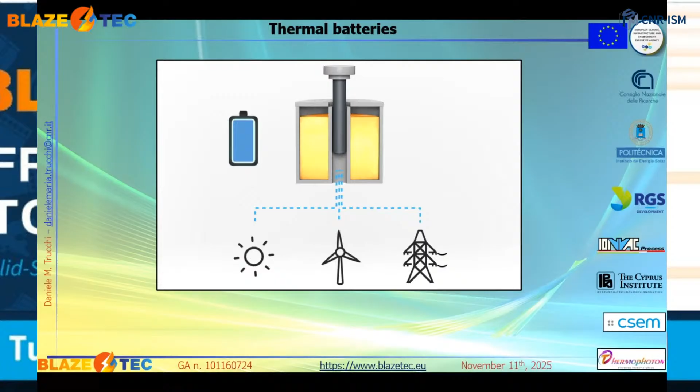Thermal batteries can be charged by renewable energy, such as concentrated sunlight, or excess energy coming from wind or photovoltaic systems. The discharge of thermal batteries occurs by transmitting energy to the grid, and for this it is necessary to have efficient and compact converters to convert efficiently the stored energy.

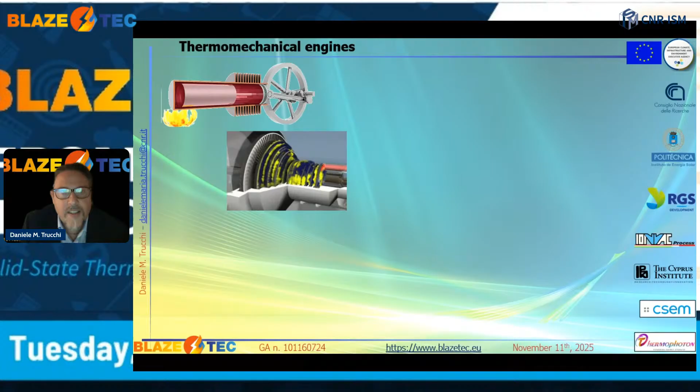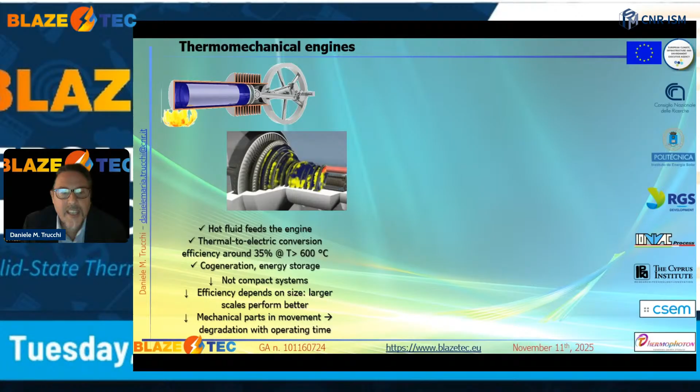Historically, the technology used thermomechanical engines like turbines and Stirling engines. They work with hot fluids feeding the engines, with high thermal to electric conversion efficiency at high temperature. They allow cogeneration and energy storage. On the other hand, they are not compact systems - the efficiency depends on size, especially for downscaling where they are much limited. So the cost competitiveness of these systems depends on the scale. They have moving mechanical parts, so they experience degradation with operating time.

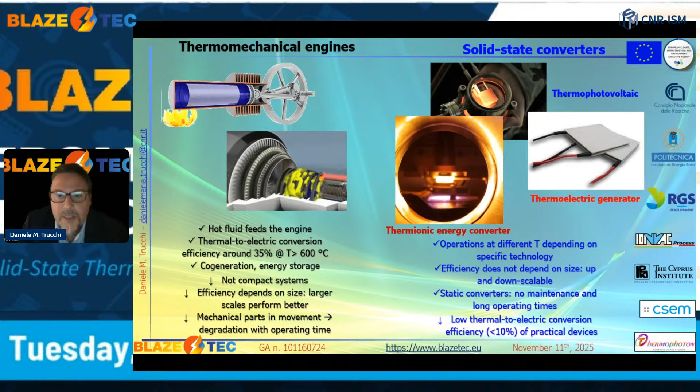On the other hand, solid-state converters, such as thermophotovoltaic, thermoelectric generators, and thermionic energy converters, can operate at different temperatures depending on the specific technology. Their efficiency does not generally depend on size, so they are down- and up-scalable. They are static converters, so there is no need for maintenance, and they have long operating times. On the other hand, they have historically demonstrated low thermal to electric conversion efficiency, lower than 10% for practical devices. In the consortium, we will work on solid-state converters.

The consortium is composed of Consiglio Nazionale delle Ricerche, with a group specialized in thermionic energy conversion, Universidad Politécnica de Madrid, with a group specialized in thermophotovoltaics - together with CNR they demonstrated the first hybridization of thermophotovoltaics with thermionics - and RGS Development, a high-tech small-medium enterprise specialized in production of energy solutions based on thermoelectric generators.

Also in the consortium: IONVAC Process, another high-tech small-medium enterprise expert in vacuum and plasma technologies; The Cyprus Institute Research Center, expert in concentrated solar technologies, providing the Proteas facility that will be a site for building the demonstrator; and associated partners the Swiss Center for Electronics and Microtechnology in Neuchâtel (CSEM), and ThermoPhoton, a startup focused on developing and commercializing future thermal batteries.

Let's discuss the aims and objectives of BLAZETEC. We want to develop ultra-high temperature converters, in a temperature range from 1200 to 1600 degrees centigrade, starting from three legs - three technologies: thermoelectrics, thermionics, and thermophotovoltaics.

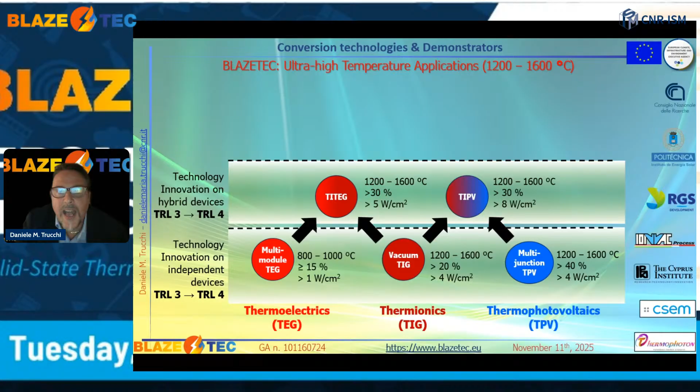The first objective of the project is to increase the efficiency of each technology and also increase the output power density. After that, to hybridize them into thermionic thermoelectric generators and thermionic thermophotovoltaic generators, increasing efficiency and output power density by taking the benefits of hybridization.

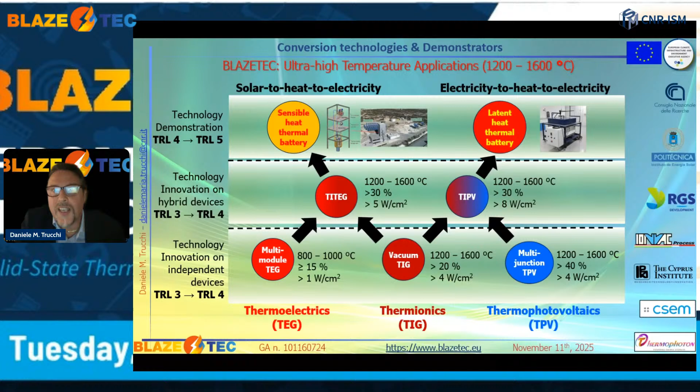Finally, to introduce and integrate these converters into two demonstrators: one, a sensible heat thermal battery working with a solar-to-heat-to-electricity cycle, and the other demonstrator is a latent heat thermal battery based on an electricity-to-heat-to-electricity cycle.

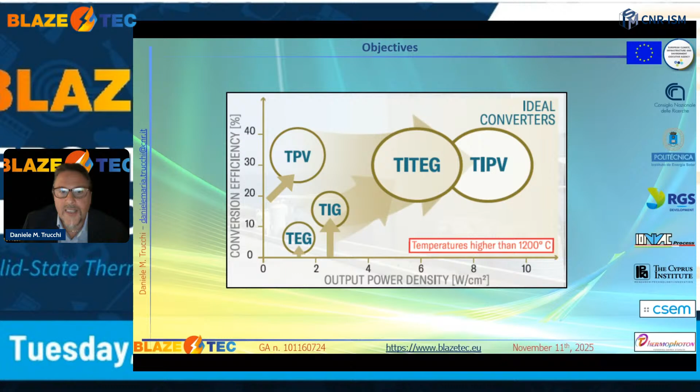The objectives can be summarized by this plot with conversion efficiency as a function of output power density. The first aim is to increase the efficiency of, for example, thermoelectric generators and thermionic energy converters, and also to increase the output power density of thermophotovoltaic cells, and to hybridize them to increase both efficiency and output power density. Thank you for the attention.

I leave the floor to the colleagues who will give details about the technology.

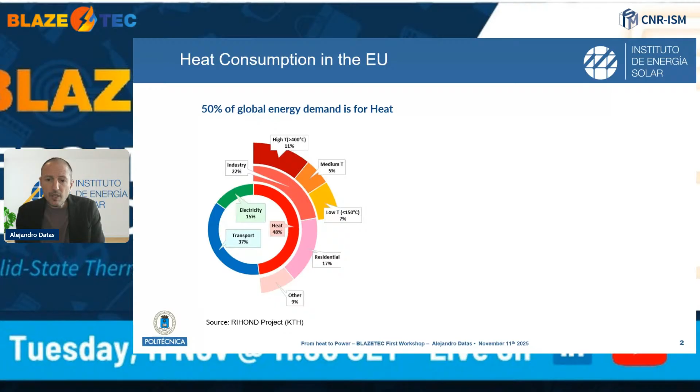So there is a challenge to decarbonize this heat demand, because the other main data point is that more than 60% of this heat demand is satisfied by burning fossil fuels. In this figure, you can see that natural gas is the main contributor to heat generation.

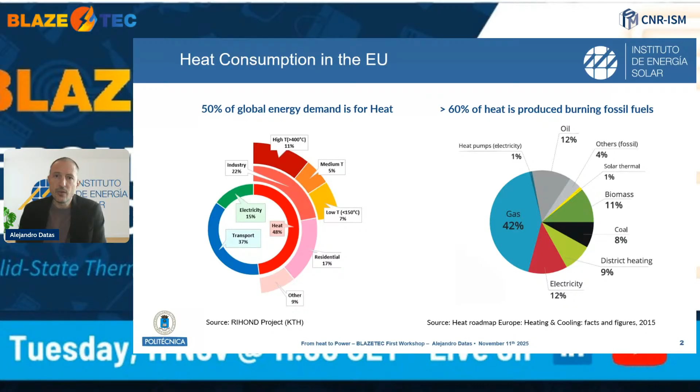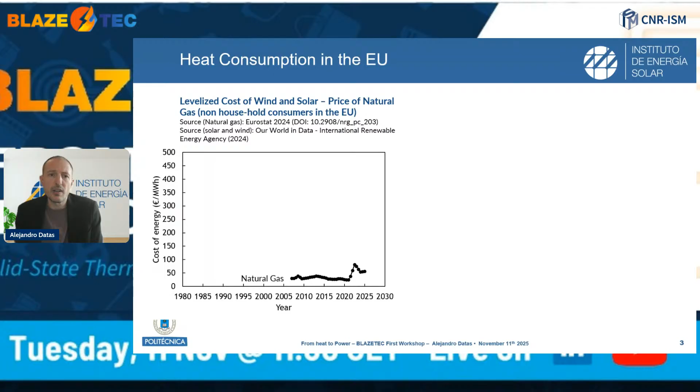If we compare this with the levelized cost of electricity for solar and wind—I think this is quite an important representation—we see that we're living a quite historical event: solar and wind electricity is now cheaper than natural gas, at least in the European Union. This is quite unique and is triggering big interest in using electricity instead of natural gas to produce heat.

This is about the cost, but the interest is even higher if we look at the price, because in the markets, the price goes to zero when there is a surplus of electricity. This is a real case in Spain in June this year, where during the solar hours the price went completely to zero, and obviously industries were looking forward to using this very cheap energy instead of burning natural gas.

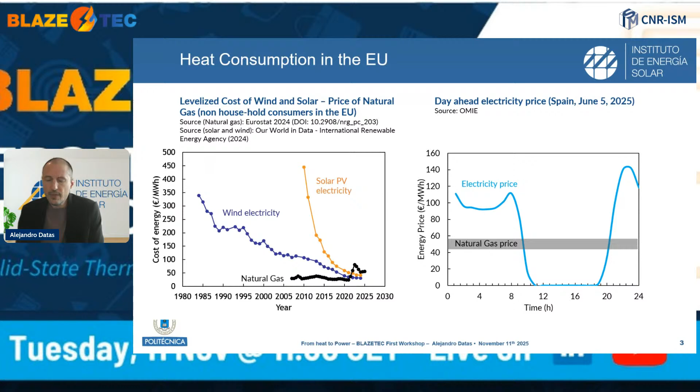And the problem is that renewables, in particular solar, are intermittent, so you cannot produce all your heat using this electricity. And this is where the concept of a thermal battery comes in.

A thermal battery, in a first approximation, can be assumed to be a system that basically converts electricity into heat, stores it very efficiently and at very low cost—because you can use cheap materials to store the heat—and then with a heat exchanger, you can deliver the heat to the demand. This is the simplest form of a thermal battery.

Then, once you have the heat energy stored, there is a very interesting concept where you can convert the heat back to electricity. This is the power-to-heat-to-power concept, sometimes also named Carnot batteries.

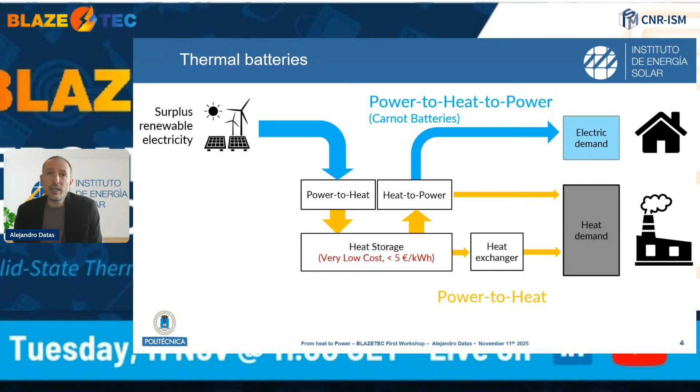We can also supply electricity demand with the same thermal battery, just adding heat-to-power conversion. If we elaborate further on the concept, we know we can generate heat not only using electricity, but also using sunlight through concentration, or even waste heat in industry. So there are other inputs to the system, illustrating all the possibilities of thermal batteries regarding input and output energy.

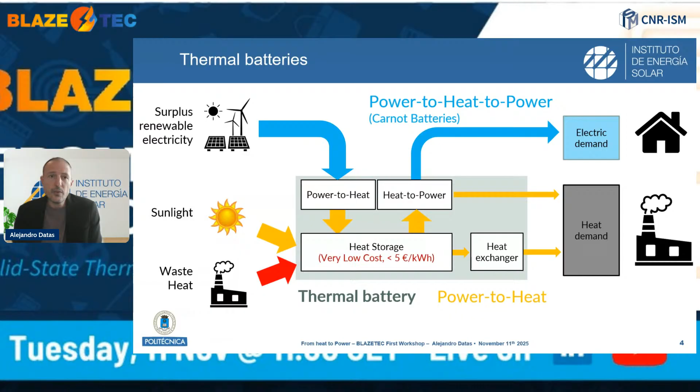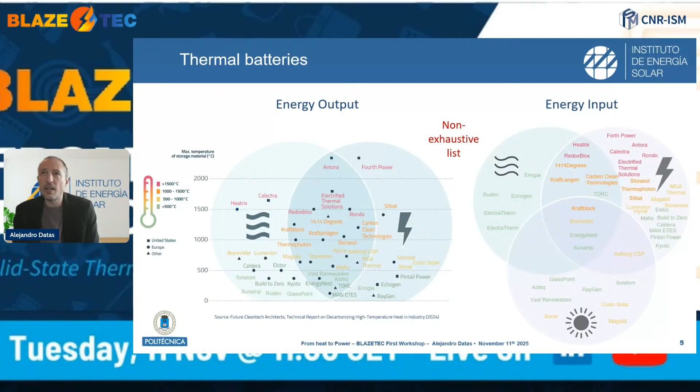Here you have visual representation examples of these companies, so you can see we're not just in the design phase, but actually building systems. Some companies are more developed than others, and some have already reached commercial stage.

In this talk, I wanted to focus on a specific subsector of these companies. Let me talk about these four—two based in the US and two based in Spain.

A common characteristic of these four companies is that they use ultra high temperature storage materials, storing energy at extreme high temperatures. The energy density can be very high depending on the temperature you reach and the delivered temperature—you can reach even 4,500 watt-hours per liter, which is orders of magnitude greater than, for instance, molten salts or lithium-ion batteries, just as an example.

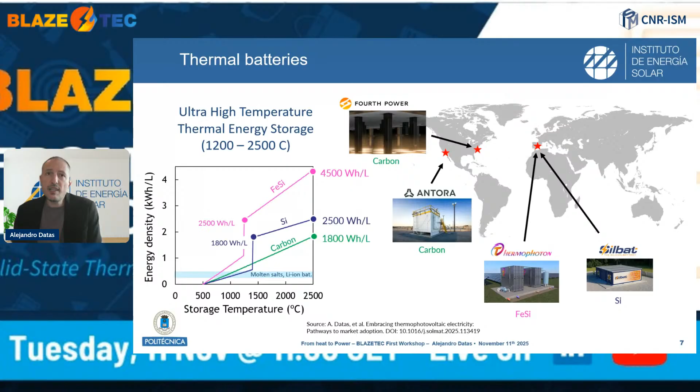The real common characteristic of these four companies is the energy conversion process: they use thermophotovoltaic converters to produce electricity out of stored heat. This technology basically consists of a photovoltaic cell illuminated by the incandescent heat, directly producing electricity. It's solid state, with no moving parts.

The main characteristic of these cells is that they can be extremely efficient because they can recycle out-of-band radiation. Wavelengths longer than the characteristic band gap of the cell can be reflected with a mirror in the back of the cell and recycled back to the emitter.

If you look at the different efficiency numbers attained in recent years, several authors have already surpassed 40%—importantly, also across a wide temperature range. Typically you need very high temperatures, but you can get quite good efficiency at almost any temperature, thanks to the high quality of mirrors developed in the last few years.

Zooming out to see what this efficiency means in the context of heat engines, thermophotovoltaics has already reached the efficiency levels of steam turbines or gas turbines—quite a relevant milestone. Of course, it's been demonstrated at lower power levels, but it's still a really important observation. This is why these companies are looking at this technology as a solid-state, low-maintenance way to produce electricity.

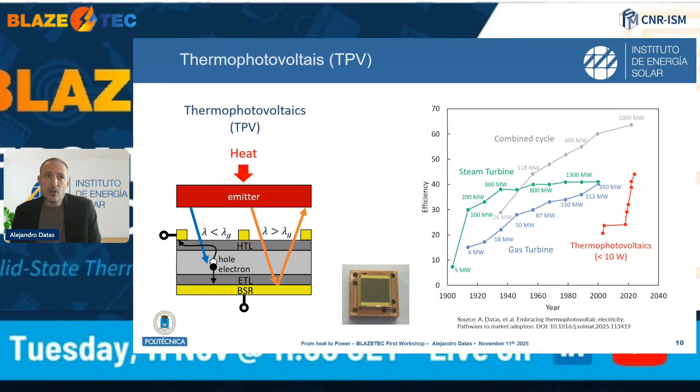Of course, thermophotovoltaics is not the only solid-state heat engine, as Daniele already explained. We could also use thermionic generators, which consist of direct emission and collection of electrons to produce electricity, and also thermoelectric generators, which create a solid continuity between the hot side and the cold side, producing a direct flow of electrons through the material.

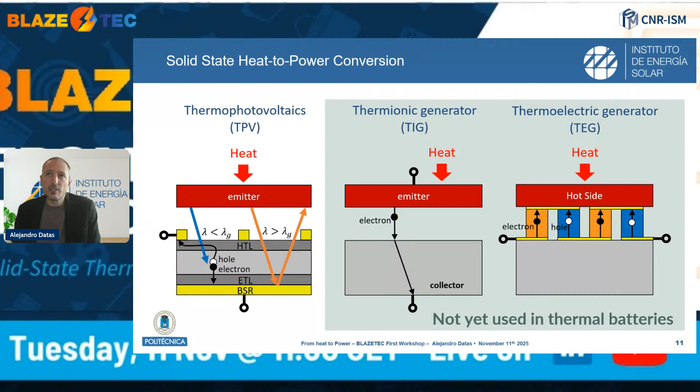To my knowledge, there are no thermal battery developments using these converters yet, or if they are, they are still at very small scale. So I wanted to explain why this is happening, why we are not using this yet in business projects for storage.

In the case of thermionics, it has not been quite developed in the last years, because most of the activities were taking place in the past century, basically.

So here we see that efficiency is normally the key performance indicator for thermal batteries, because in principle you are using very valuable energy that you want to convert efficiently. But this is not necessarily the case - sometimes you can afford lower efficiencies if the input energy to the battery is very cheap, because in that case cost is more relevant than efficiency.

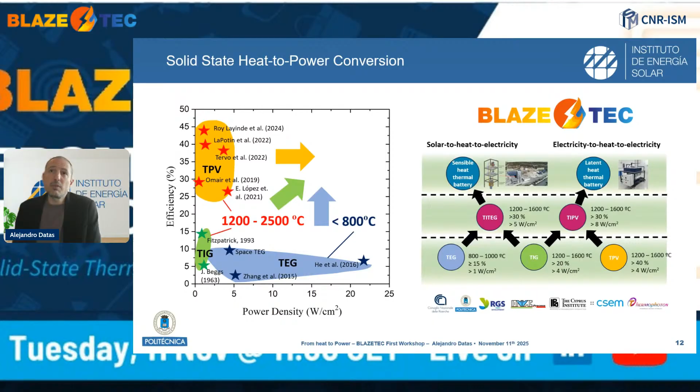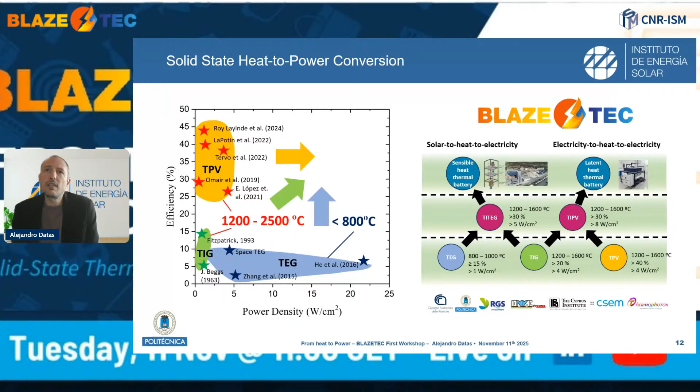And this is precisely what we are doing in BLAZETEC. We are investigating these three technologies, trying to improve efficiency and power density through hybridization. The idea is to combine thermoelectrics with thermionics, and thermophotovoltaics with thermionics as well, to produce two hybrid devices that can have higher efficiency and power density, and demonstrate them for the first time, I think, in a thermal batteries context. So thank you very much, and that's all, and thanks to the BLAZETEC project, of course.

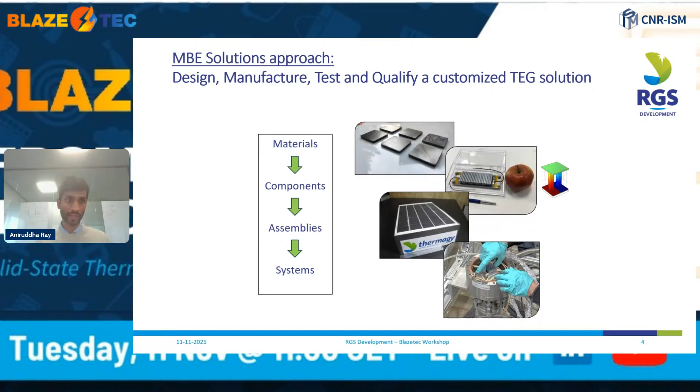This model-based engineering solutions approach we carry out in three steps. First, we do a pre-design of the tech solution, a thermoelectric generator solution, over a period of 4 to 6 months, where we study the environment and simulate and define the best suited device for such an application.

Thereafter, over a period of a year to 18 months, we do a detailed design and prototype production of the first prototypes of a thermoelectric generator, and we start testing and optimizing the TEG to operate in the final conditions.

Once that step is complete, we go to the final one, where we establish a qualified production, because the materials have to be at a certain level, and then we start manufacturing the TEG solution based on those materials.

Finally, we also support the system integration, because we have a perspective on the final application, and we can start simulating both the integrated device as well as the assembly in the final application.

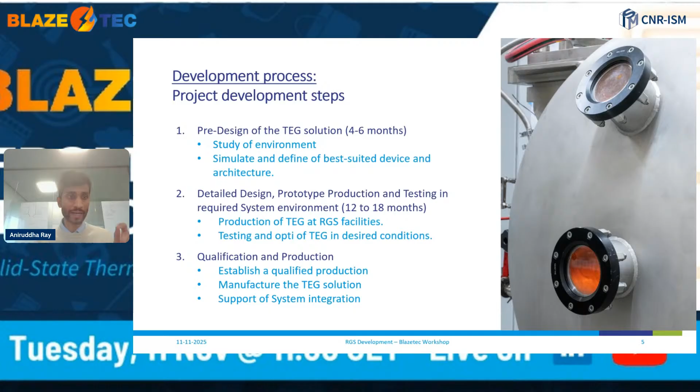The material we use is silicon germanium, as I mentioned in the past, which can survive up to 1000 degrees centigrade on the hot side, making it a good complement for thermal batteries, where you would like to store energy at high temperatures to enable high energy density.

In this presentation, I also wanted to show you a case study of this model-based engineering approach, where we worked together with the University of Dayton in the US to integrate a thermoelectric generator around a GPHS block of nuclear fuel, which has been previously qualified in the US for space missions.

It has to be rigorous, it has to be integrated, and it can be done also with conductive coupling. What we did was take 250 watts of thermal input to generate 10 watts of electric output. We worked closely with the system builder to achieve a high specific power, which is a key performance indicator for these space systems.

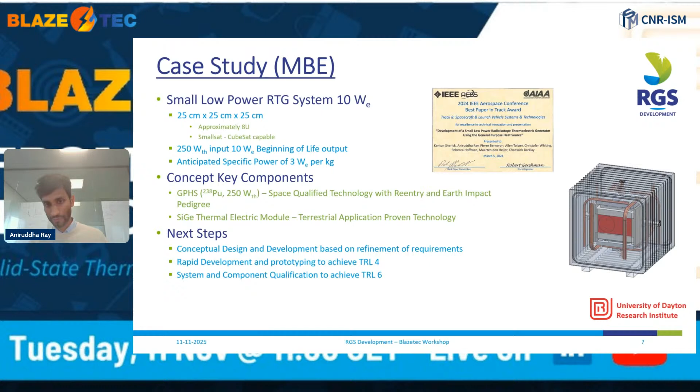And then rapidly we do the prototyping as well as the development from our side. Just a few takeaways from this.

We have this model-based engineering approach where we do multi-physics simulations to capture the coupled heat flow as well as the material transfer properties, in order to generate electricity of the required amount across various operational temperatures.

We also make a cascade module, which is what we are developing within the BLAZETEC project to get to higher efficiencies by using materials and modules appropriate for the various temperature windows.

This model-based engineering approach and workflow allows rapid iterations and trade space exploration for various applications, and we can do it with limited prototyping.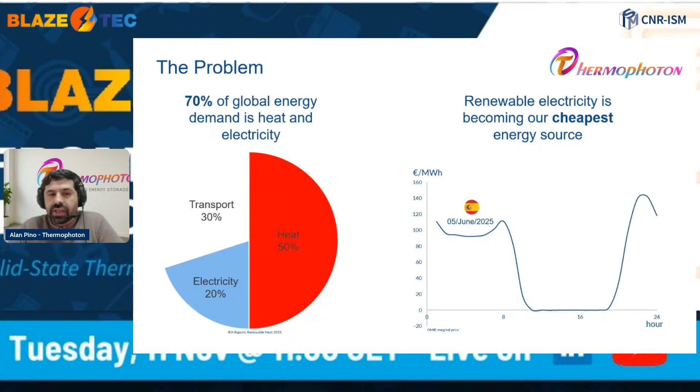If we see also this curve, this is the electric price of a wholesale market in Spain. We already have seen it, but we can have on the same day very cheap prices, even negative ones, and very expensive, usually before and after the solar time. So it makes a lot of sense to store this electricity when it's cheap and then use it when it's expensive. And this is the basis of our technology.

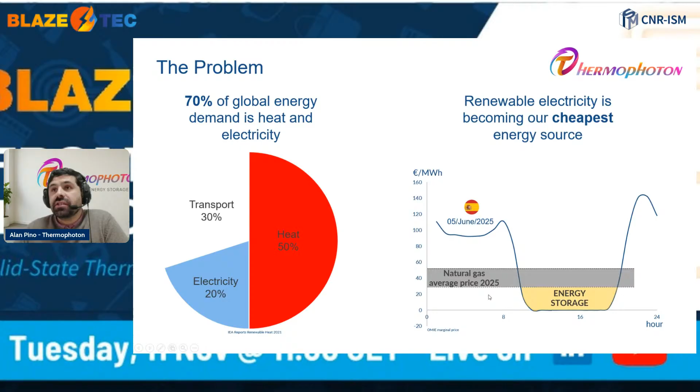So we are developing the thermophotovoltaic battery, and we use this cheap electricity to heat up metal-based phase change materials, which are stored, and then we can supply electricity and heat to the end user on demand.

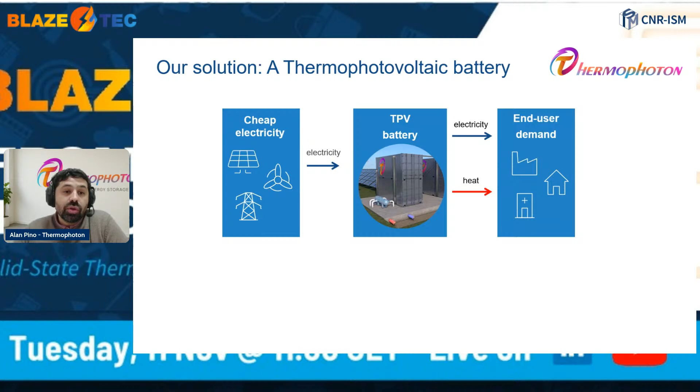To do this, we combine 3 key innovations, one of them being a very high density heat storage medium, based on phase change materials. The second one is a safe and efficient indirect heat exchanger. We are working on that to supply high temperature heat. And the last one is the energy conversion. I will focus on this because of the topic of this workshop, and it's based on solid-state TPV modules.

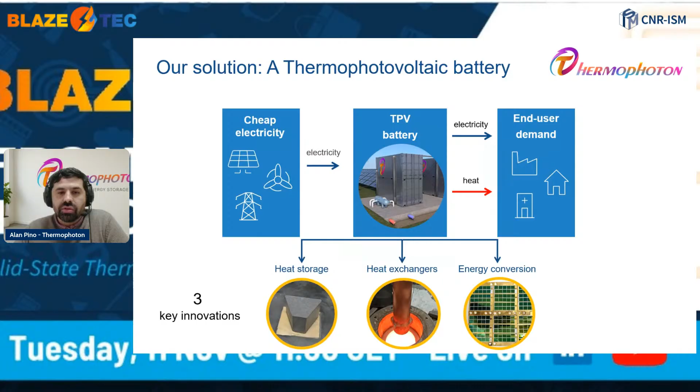The introduction has already been made by Alejandro, but in simple words, the thermophotovoltaic cells are like solar cells, but instead of looking towards the sun, it is in front of a hot emitter. In this case, this is inside our battery, and it can convert these infrared photons into useful electric power. Main characteristic is that it's a solid state system, so it's completely silent operation, no rotating parts, no moving parts like a turbine, and no working fluids. It can reach high efficiency conversion and power density when it works at high temperatures. And also other applications apart from thermal batteries can be waste heat recovery, or even concentration solar.

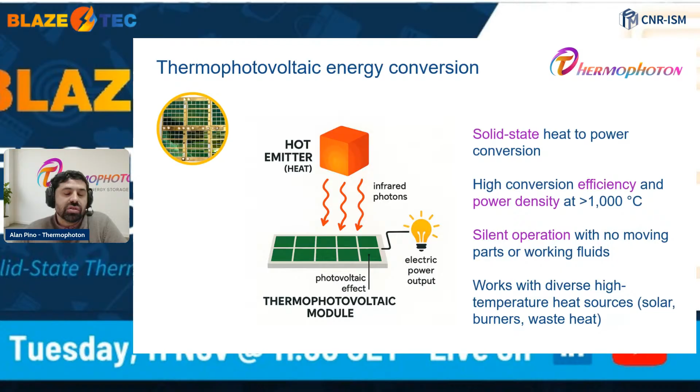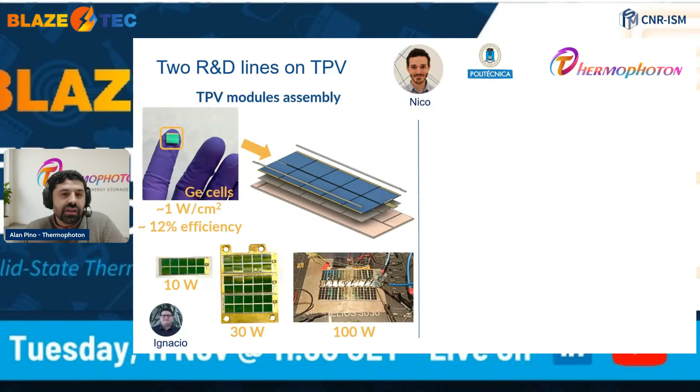In this regard, we are working on two fronts in our R&D department on TPV. The first one is to scale from cells to modules. And here you can see one germanium cell of about 1 square centimeter and about 1 watt of power. It can reach 12% efficiency. But we are using the cells to integrate them into useful modules that can already be used to get an electric output. So we have already moved from tens of watts to already 100 watts that have been measured, and it is still increasing in terms of size.

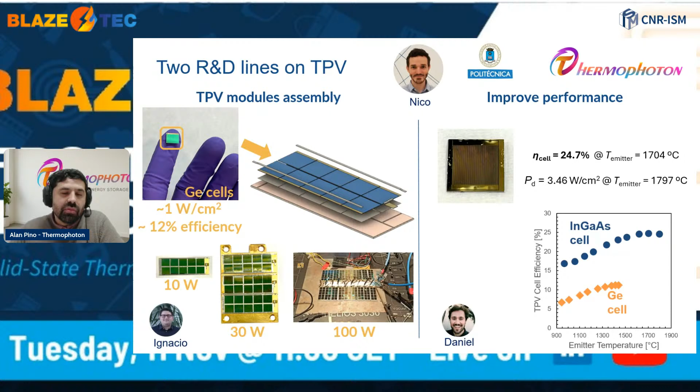And the other branch is improving the performance, so exploring new materials and new designs of TPV cells, in this case InGaAs cells. We have reached already higher efficiencies, and if we compare with germanium cells, it's a huge improvement, and we are still working on that to have a more space efficient use of our system, and that will increase the total output.

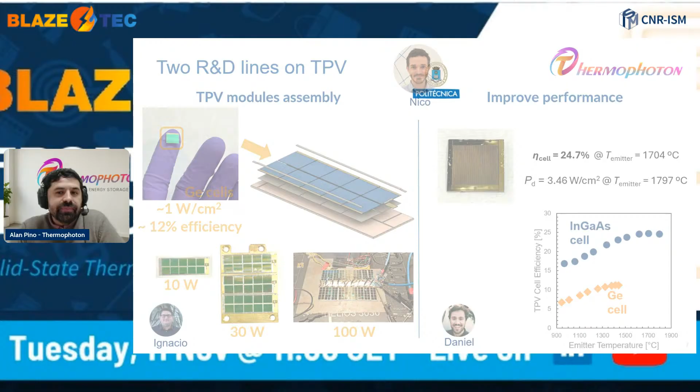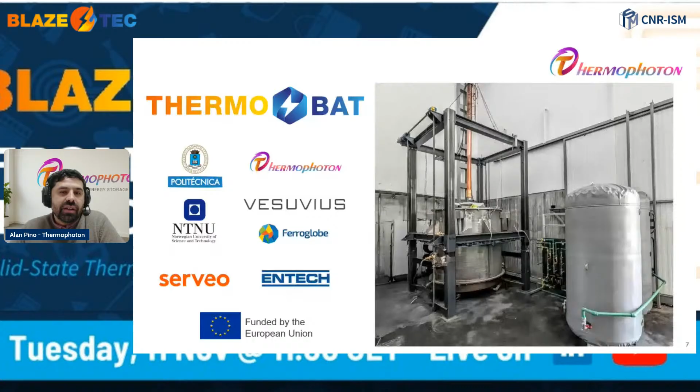It can store about 100 kilowatt hour and supply around 10 kilowatt of combined heat and power. It also has all the thermal system to supply domestic hot water, and includes complete, extensive sensors, so we can characterize the behavior of the battery and then decide how to optimize both the TPV system and also the thermal subsystem.

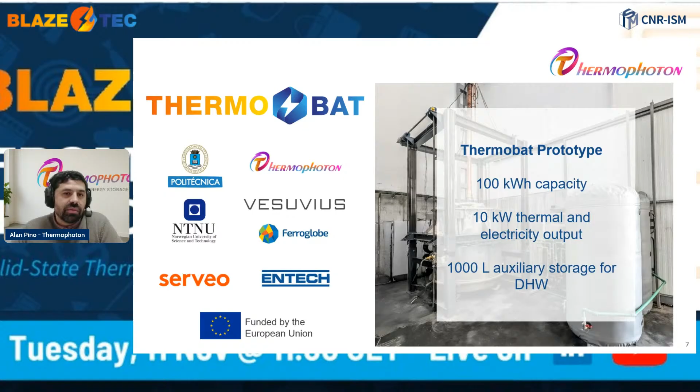The next step could be to go and install this technology into a real environment. So by early 2026, we have planned to install it in a sports center here in Madrid, together with our ESCO partner, Serveo, who is also part of the project. The battery will mainly supply electricity, but also domestic hot water, for an equivalent of about 55 showers per day, that will displace natural gas consumed by the sports center.

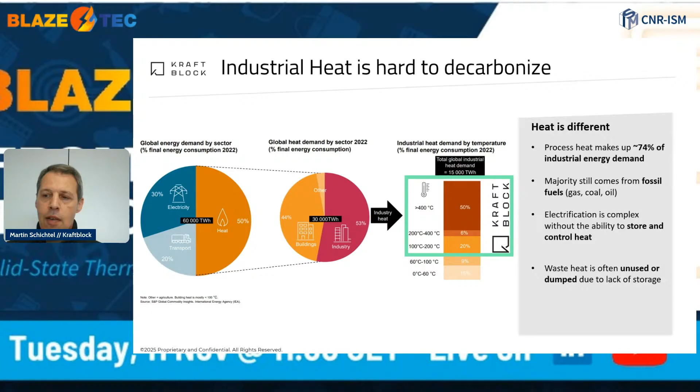Briefly about the company. When we talk about Kraftblock, usually it is the company name, it's the product, and it's our team, so we all are Kraftblock somehow. We have been founded, as you can see, in 2014 already, in a quite early stage of the market, where just a few players were thinking about offering thermal storage solutions to decarbonize process heat. For us, it was a no-brainer to go over there.

We've grown very much, 43 international, multinational team members, meanwhile a very small but high-performing team, because we strongly bank on a network approach. It means there are specialists for all types of the components we are using in the market, so why should we integrate it into the company itself, especially with the approach that we have at the moment? Patents, of course, also very important.

There is much more to come. Three more families will be released this year, because we not only focus on the storage material or the storage itself, but on the whole storage system and definitely the processes, how to operate the storage. What is unique, what is different with us to many players in the market, we offer what we call a storage platform. I will explain the principle in a slide later, which basically means you have one standardized storage which you can connect to different charging or various discharging options.

And create a huge degree of freedom to design the system itself. Sustainability, briefly, two angles. One, of course, is the customer, decarbonization and creating energy resilience. But for us, it's important as well, so we developed our own storage material, which is a ceramic-like storage material. It's fully inorganic, but we do not need any heat to cure it or to generate our ceramics. We do it at room temperature, just using a chemical process, so also there, saving a lot of energy and avoiding carbon dioxide emissions for this process.

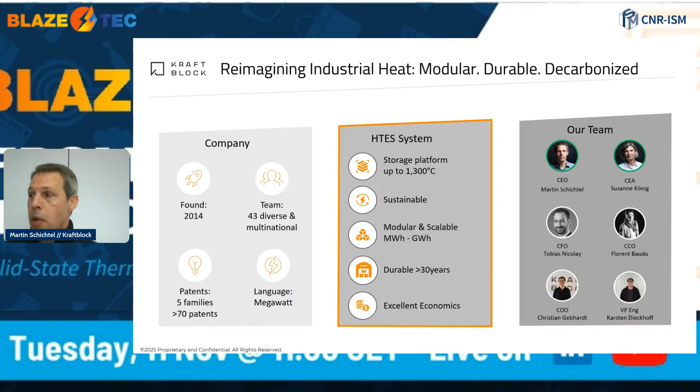Of course, we also have a very strong leadership and a founding team in the background to cover especially the commercialization of our project. Here's our journey from lab to industry.

We started the company just with an idea in mind. It was pre-developed, yes, it was pre-calculated, yes, that's true, but not out of university. It was just a private pleasure that we had at the beginning.

Then we developed our own storage material. We'll describe it a little bit later why it's that special and why it might offer a lot of options for future applications. As said, we tested it very strongly.

In 2019, we released our first proof of concept system to the market. Proof of concept is, in this case, a waste heat recovery unit in the ceramics industry, and that company is the top 3 company in grinding wheel production. So a lot of batch-driven furnaces recover the waste heat.

Our storage operates as a kind of external regenerator, recuperator, circled back to preheat the furnace during the next ramp up, which saves roughly 17% of gas, a lot of carbon dioxide, and makes the processes much more controlled with some additional value adds for the customer.

2020, this looks a little bit more strange, and the storage looks a bit different because that customer owns a fleet of 80 trucks. So we adopted the outer shell of the storage to the trucks itself as a Swift container. It's a mobile storage. So you charge it in one place, you put it on a truck, transport it somewhere else.

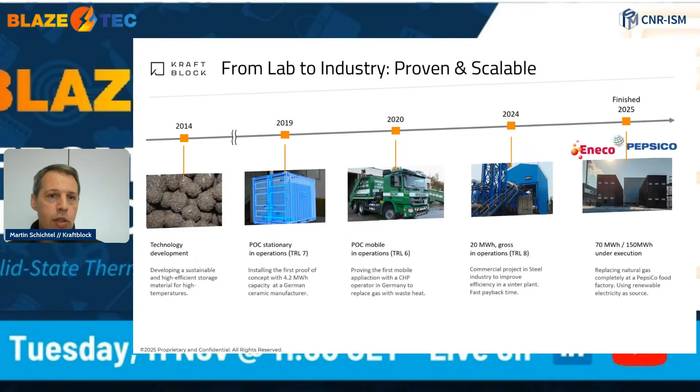And the first electrification project, so replacing a 25 megawatt gas boiler against an electrified thermal storage, is now nearly completed in commissioning and will deliver first heat towards the end of this year to PepsiCo, the final customer, and of course the utility in between, delivering the green electron and doing the contracting services.

What is the storage platform? What do I mean by that? What we did was to remove all the components to operate the thermal storage out of the storage and define interfaces to the charging system and to the discharging system. Means the storage in between is, we call it KISS, keep it simple and safe.

It's a standardized module with already, meanwhile, 6 years of operation experience behind it. So a very good data set, which we can then combine with, let's say, a flue gas system for waste heat recovery, electrification of process heat using green electron. Also, even concentrated solar thermal heat can be used directly to charge our storage.

Means basically we charge using a hot gas because we go to high temperature, and at the moment it's still more or less the cheapest heat transfer media that we can have. Discharging, of course, the opposite way. We use ambient air, go through the storage, and then to the discharging system, which might be a waste heat boiler, which might be an air thermal oil system, whatever it is.

Important, and that's why I said we try to go for market education, the system that we have in the market today is different than the one you will see in 10 years. But we need to create the system that can be understood by the customer, where you minimize the risk to a max. That's why we use only out-of-the-shelf equipment for charging and discharging.

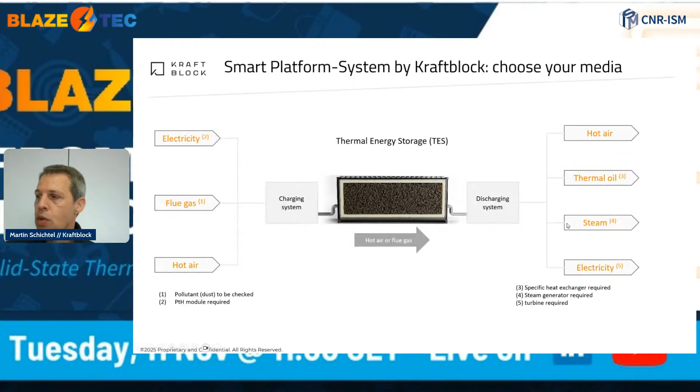So tons of references, TRL9 equipment in the market. That's a perfect combination. So yes, it's a first of its kind each time you do a new deployment, from hot air to thermal oil or electricity, power-to-power applications. But basically, we are backing very much on standard products.

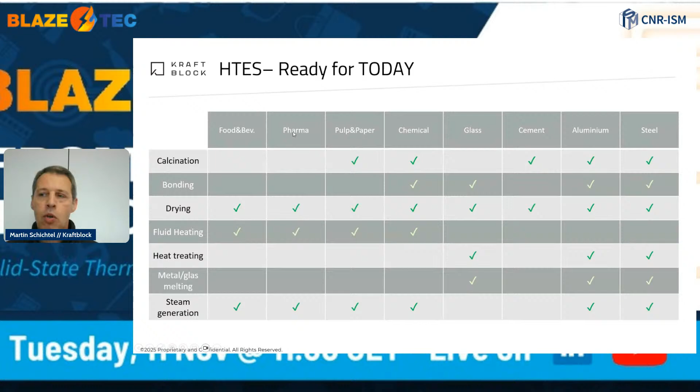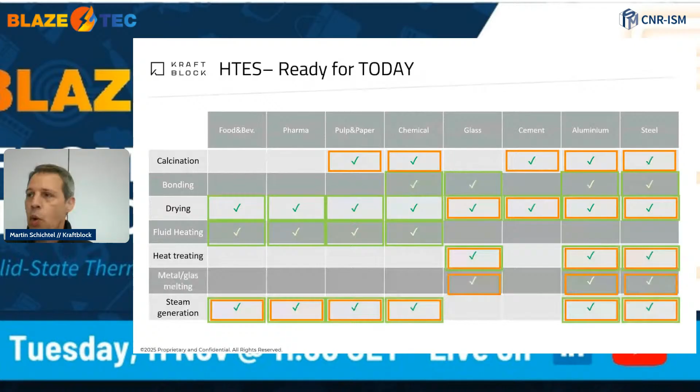So quite a broad bandwidth from low temperature to high temperature industries, with typical processes you can find over there. Where I just marked it now with a green rectangle, those processes can easily be electrified at affordable cost to the customer. The orange one symbolizes you can go for waste heat recovery, because there is huge waste heat potential available worldwide in those industries, which would be the first step to tackle before you fully skip the process and go for electrification. But you also can use both systems at the same time.

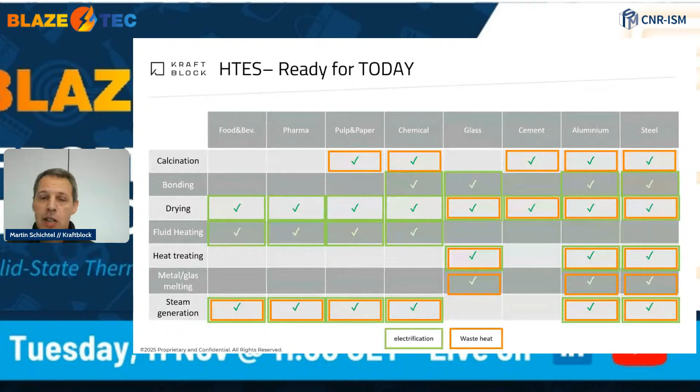Our storage material is a development by ourselves. We looked at chemical storages at that point in time - well, too complex, too expensive. Phase change materials were also not in favor with us, because we wanted a storage that can operate in a whole broad temperature range rather than being focused on a special temperature segment. And also, of course, things like molten salt - corrosion, system stability, degradation - were quite early stage for those materials when we started. So we stayed with sensible storage materials.

We are using mainly upcycled or recycled materials, for example steel slag, waste of bauxite production, waste of copper production, combined with a special type of binder that we developed for our material, and then just put it into the storage device. Storage temperature, as I said at the beginning, maximum 1300 degrees C at the moment. The storage material itself could go way beyond 2000 degrees. So why do we limit ourselves to around 1200-1300 degrees? Again, keep it safe and simple. If we go higher, the process architecture changes, the system setup changes, the integration to the customer changes, and there are just very few applications higher than that temperature level. So with this temperature cap, we could cover roughly 96% of the applications in industries. That's why we're quite fine with that, especially thinking about commercialization and standardization.

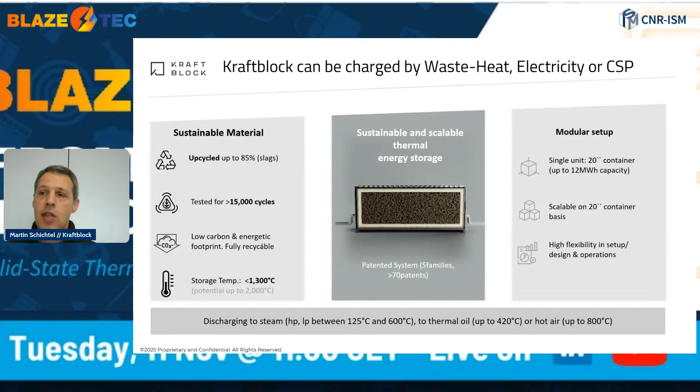Let's have a closer look at the storage material to describe why it's that special. Our storage material, as I explained, is a combination of what we call capacity fillers and a very special binder. The capacity fillers, like steel slag, will be milled down smaller than 200 microns in a very specified grain size mixture to get maximum density of the core material itself. Then we mix it with our special binder. The special binder is a phosphate.

What is the idea behind this? Good heat capacity in sensible materials usually means worse heat conductivity. But if I want to follow a technical process very fast with low latency time, I need to have very strong conductivity as well. As we now mix strong conductivity with a phosphate-based binder with good capacity from the capacity fillers, we can balance out what we prefer. Do we prefer more heat retention? We reduce the quantity of the binder. If we need a fast cycling system, we increase the binder slightly in order to charge much faster and discharge much faster.

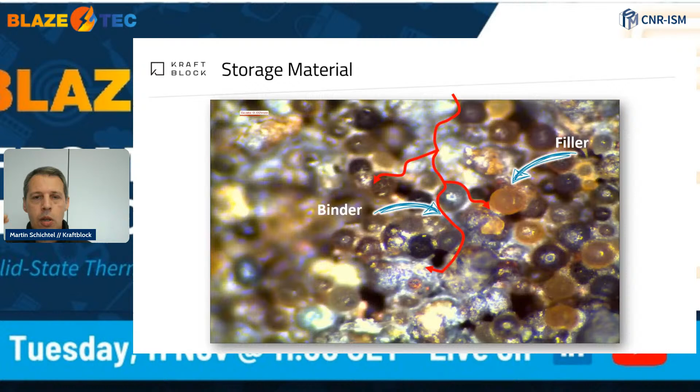And that's basically seen in this microscopic view, right? We use those binders, which are the whitish lines in between the particles, to transport the heat deeply into the core of the material. If you go for an IR photograph - unfortunately I'm not allowed to publish it yet, but I think there will be a publication beginning of next year - if you charge the particle, split it in the middle and take an IR photograph, you can see that the shell is nearly as hot as the core. And that's what we need if we want to have a very strong capacity and storage material use.

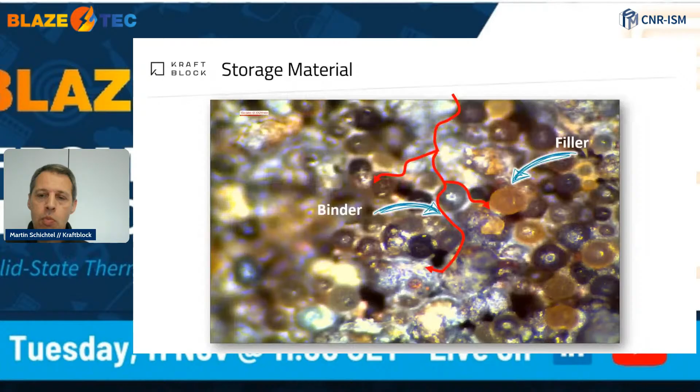We're focusing on smaller capacities at the moment because 80% of the requests that we have are below 150 megawatt hours. There are only a few going for gigawatt hour scale thermal energy storage at the moment.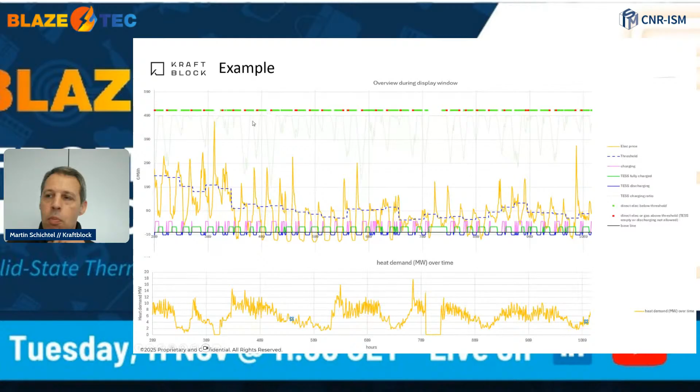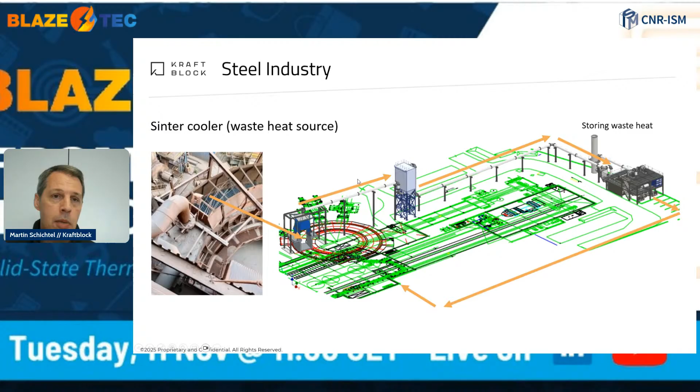Waste heat recovery, same setup, we just use a different charging system. We already explained this project in the steel industry where we recover waste heat from the sinter cooler station. We, of course, need a bag filter to clean the heat, take it to the storage and circle it back in a closed loop to the system again. The effect here, and the system is in operation since the beginning of this year, is a payback time of less than 2 years, extremely important for the industry, and it increases the efficiency of the sinter plant by 2%, which is even a stronger value add.

This is just a couple of pictures of the system. The storage device in the middle is the bag filter and the whole infrastructure that needs to be integrated as well. Basically, I'm at the end with my talk.

One remark, I said it at the beginning, we are Stone Age at the moment, but we are preparing the next step in the background because the storage will look pretty different in 10 years. Hopefully, and that's why I'm really looking forward to the results of projects like BLAZETEC, how power to power develops, how TPV and the thermoelectric conversion will develop in future and how it could be used. Thank you.